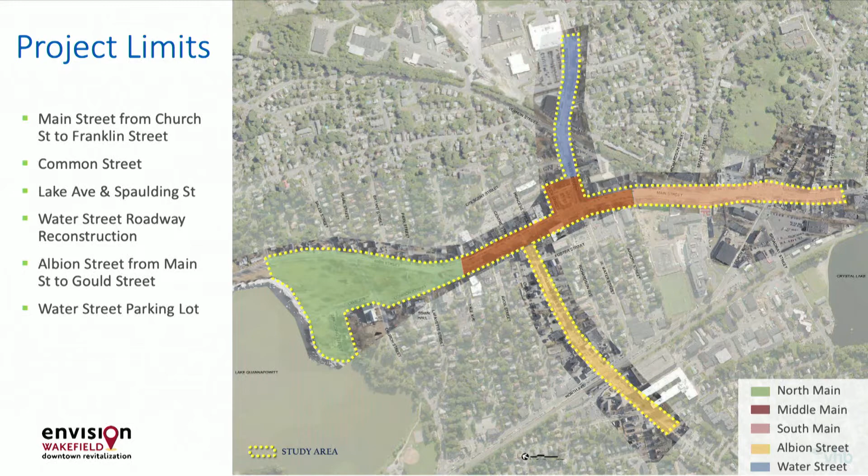The vision has always been the same. It's really making this a destination. We want to make sure that even though people are driving through Main Street and on the other surrounding roadways, that it's a safe condition for those people that are passing by, but also the people that are visiting Wakefield.

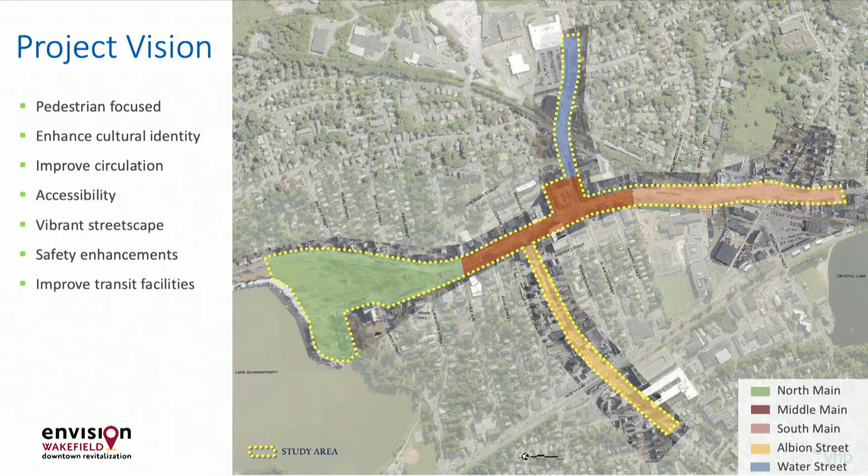One of the biggest objectives and what we've heard is we want to make sure that it's a walkable community, that people can get from the Galvin School and the new bike path going in adjacent to the Galvin School all the way up to the downtown area and enjoy the amenities you guys have in Wakefield. It's a beautiful town. We want to make sure people can actually come and get to it safely in all modes of transportation, not just vehicle, not just pedestrians, but also cyclists and buses. People navigate around with the bus routes that are around on Main Street and Albion Street.

This is just some of the pictures we've been showing throughout, some of the substandard conditions that are here. This is from last year where you can see people parking in the crosswalk locations. I want to point out, because there's been a lot of concerns about the width of Main Street and where pedestrians are crossing, there are a high amount of accidents occurring on Main Street.

There was just one a couple weeks ago, is that right, where a pedestrian got hit by a vehicle at the intersection of Main Street with Water Street. So those things are very serious, and we want to make sure we address those issues as we move forward with the design development.

You can also see from these pictures that some of the materials are tired. When they were first installed, they looked beautiful, absolutely fabulous, and now it's time to actually replace them with more fabulous things. They've lasted through a life cycle, and now they need a new life.

So we went through a public process from November of 2018 through last year to town meeting, which was in November. We went through a public process that was a pretty hefty public process. There were monthly stakeholder meetings. We had public meetings, I'd say, every 6 weeks or so.

The town has a wonderful communications point of contact, Jen McDonald, who actually did all of the social media, and she helped out as much as she could. It was just a terrific job of messaging the project and making sure the information was out there, that anything discussed in public meetings, the videos we showed, was actually posted on the town website, and they're still posted on the town website. So if there's anything you'd like to see that had been presented in the past, they're still up there for people to take a look at.

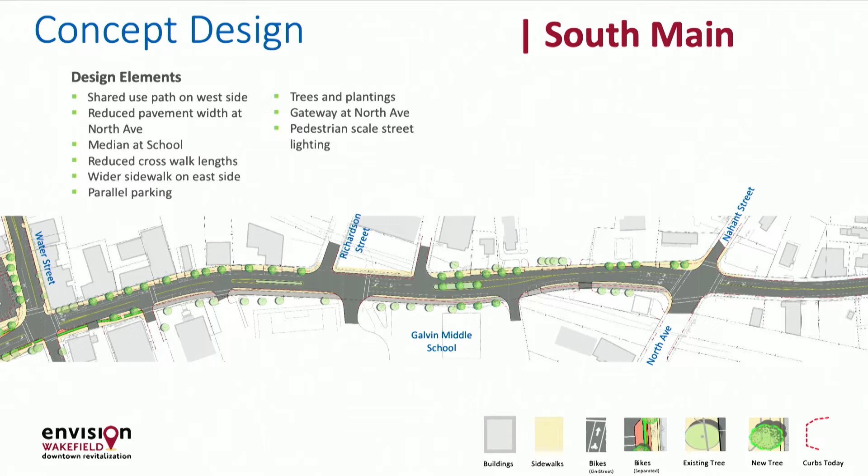On the section we're calling the South Main section, Water Street is down here. The parking lot is getting reconstructed as part of the project.

The thing we heard a lot of feedback on last year was parking, and the concern for parking, because although we're keeping the angled parking as much as we can where it meets standards, some of it has to go away because the roadway is just too narrow. If we kept the sidewalk where it is now and tried to put in angled parking, it doesn't meet what you need for emergency access and a travel lane with an offset for people to safely back out. To note, there were 10 accidents here over the last 3 years from people backing out of angled parking and hitting other vehicles or pedestrians. That's scary, so we're recommending changing this angled parking.

To offset any parking loss here, we're also introducing parking on Princess and Center Street. That's part of the project, reconstructing those two roadways. Can we take questions after the presentation? Is that okay?

I promise I'll go back to the slide.

What this is also showing is the angled parking in areas where you have enough offset between the median island that's out there now and the angled parking.

Also, if you walk out to the intersection and take a look, there's a lot of unused pavement out here. There's a pretty wide area - you can see the dashed line that represents the edge of the pavement, and it's kind of at a skew. So what we're doing is cleaning it up a little bit, making it more of a traditional intersection with turn lanes and through lanes on Water Street itself.

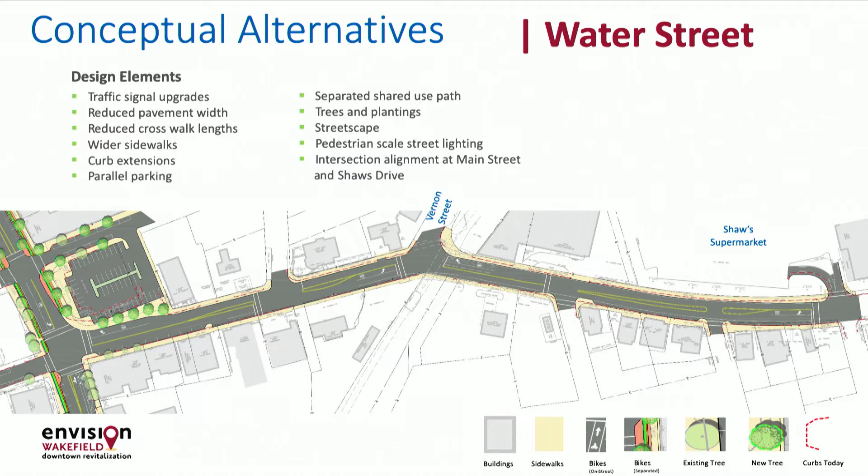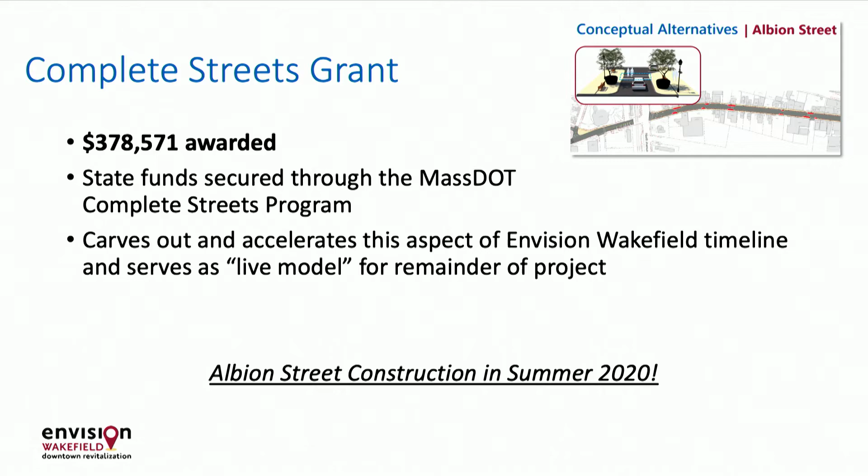One thing I wanted to note, which is very exciting, is that not only did the town get approved for the $26 million for Main Street and the Main Street project, they've also gotten approved almost $400,000 to do what's called complete streets amenities on Albion Street, and that will be the first phase of this project. It's really fantastic because it demonstrates momentum - it's going to build momentum. We're in this for a little bit of time with Main Street, and this allows for construction to occur and chip off the first piece.

This has been in the planning for a long time, and Albion Street is just a perfect example of what could happen on Main Street with the materials that are going to be selected and some of the features with the bump outs and shorter crossings - because that's another concern, people are concerned with crosswalks on all of the roadways. This is going to be a perfect example of what can happen and what the vision will be on Main Street.

Oh, and by the way, it's going to be under construction this summer. It's anticipated to be under construction this summer, so it's going to be pretty quick. Since we're already in spring now in February, it's going to be quick.

So what we want to talk about are next steps, moving forward from here, just to give you a piece of what's going to happen over the next year or so. Over the next month and a half, there will be another public meeting that will talk about some of the palette of materials that can be selected for these projects. We have to take a look at durability, aesthetics, obviously what it looks like in terms of what the town wants to see.

So what works for the town, what doesn't work for the town - some of the things we have to put in, like vertical granite curbing, will be put in, but some of the colors that are out there, some of the different types, like benches or plantings, will be presented to you, and would love your feedback on that. That would be absolutely fantastic. So I think the first public meeting on that will be in March, so we can actually talk about some of the materials.

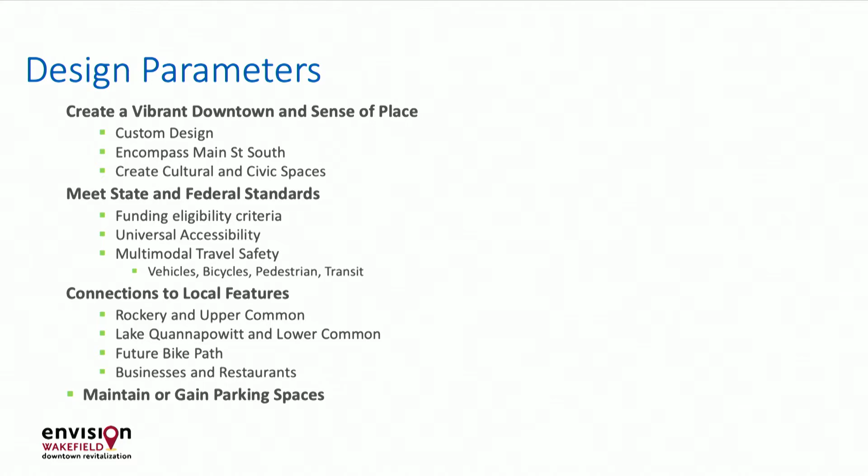And the parking itself, we've studied that. We've done some parking studies where we've taken a look at how quickly the parking spaces turn over. With the parking enforcement, it sounds like that's a success story too—people are looking to park but also not park there all day, and they're really paying attention to the hourly restrictions on the parking, which is absolutely fabulous. That just means there's a lot of circulation, a lot of turnover.

There are a lot more people who can go to the businesses and downtown destinations like the library and the post office, and people who may be commuting from Wakefield aren't occupying those parking spaces. It's terrific.

So with this, I'm going to hand it over to Jeffrey. Are you sure? I can just keep going if you want. Okay, so sympathize with Jeffrey, he has the thing that's going around right now. Trish makes it sound so bad, right?

Well, I'm so delighted to be here tonight because I just wanted to echo all the congratulations, because having worked with many communities just like yours, it's kind of exciting to be at a point in time where I know how hard the entire community has worked through all of the different public meetings.

We really enjoyed having that conversation with you. We've seen all of the different revised plans and thoughts as we've come back over those months. And now you're at the point where you can actually start to advance into the design development of the project and really start to let this whole idea come to life through the different materials and these things.

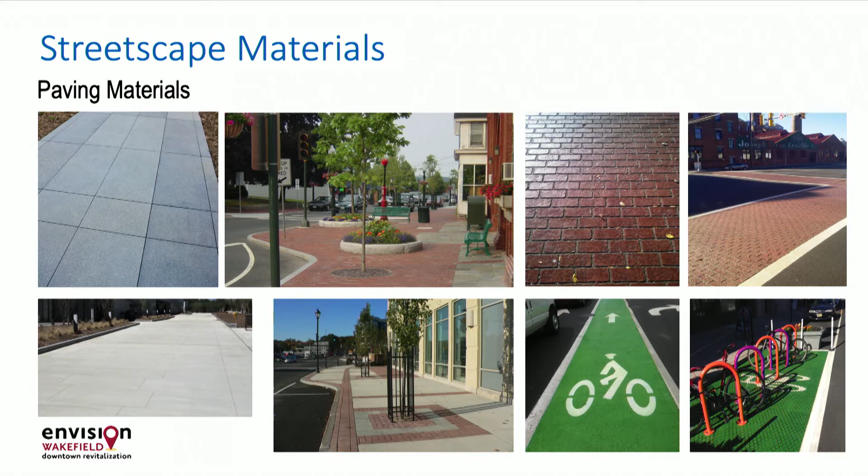What does it mean in terms of some of the street furniture? When you walk up and down Main Street, as you get closer to the Common and down to the lake, how do things like street furniture and where those benches are located really reinforce the activities that are both there today, as well as what can happen when the road gets reconstructed with a lot more places for people to walk and dine and be outdoors?

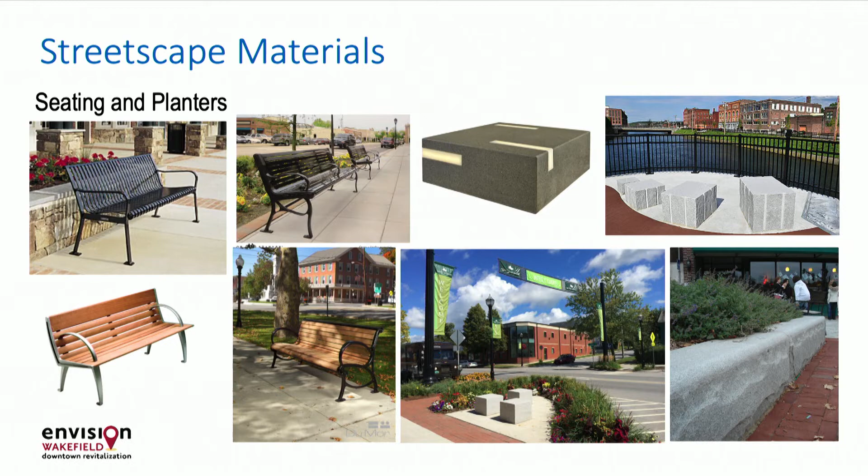And while we may think traditionally about some of the benches that might be out there in historic main streets that are not uncommon to Wakefield, what might that look like if we start to get a little more creative down on the bottom here or in the upper left-hand corner, where maybe we bring in different material choices? Maybe there's different ways of having people get seated, bringing in different materials and textures as we go through the heart of downtown as well.

What does it mean in terms of simple things like trash and recycling and some of the bike racks that are out here? This is intentionally showing a broad range of that palette, as Ed talked about before, where you're able to bring in different ways of celebrating your identity as the downtown, understanding some of the iconic footprints of downtown, and the signage, lettering, and fonts that go into that. There are very high-tech ways of hiding some of the services behind these trash receptacles and recycle bins. What do those look like? What are the colors? What does the palette look like there that really brings the heart of downtown to life?

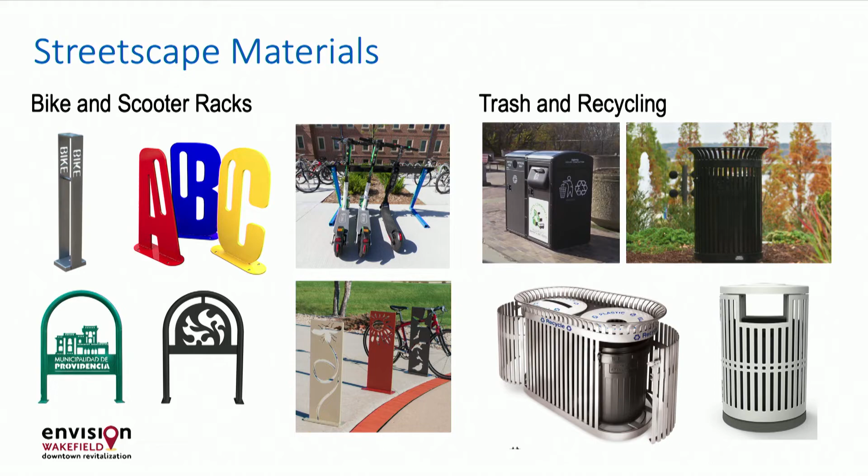And when you think about celebrating things like sustainability and recycling, many communities are looking at energy being captured, photovoltaics, powering some of the recycling and getting those uses to happen. It's also about accommodating expanded activities for downtown, where the bikes might go, or things like scooters. So you have a way of refreshing all the different modes and celebrating those in different spots here. So a lot to talk about on all of those fronts as well.

When it comes to lighting, here again we have a lot of different things to talk about, from the overhead lighting that might be higher, that talks to the vehicular scale, some of the banners and how those banners can come to life, pedestrian scale lighting as well, and what the tops of these lights look like. There are so many options out there today that one doesn't automatically have to assume it's one fixture or the other. There's probably hundreds of choices we can talk through, and how those meet some of your local standards, some of your maintenance standards as well. There's a lot we're going to be talking about in terms of that.

But what's most important here is how does that really, whatever we pick, tie into the character and the walkability and the scale of your downtown? We heard so much about making sure this feels like a walkable place here. Those ingredients really can help it feel walkable and at scale.

Bollards here off to the right-hand side. Again, many choices there, but could they light up some of the crosswalks to help make them safer at the same time about being a scaled element that people can relate to as well?

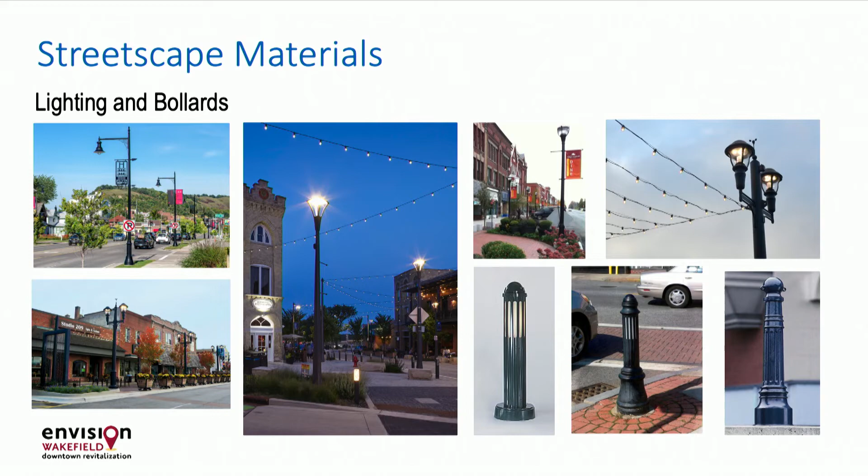Excited about having that conversation with you.

So what we thought we'd do is close by showing you a couple of other places that have gone through this transformation. We shared some of these slides at the town meeting, and I think it was actually a pretty helpful set of slides in showing this transformation.

So, for instance, the amount of parking on Princess Street and Centre Street - you only have a handful of parking spaces right now on those two streets. But what we're doing is building out those two streets to have about 20 more spaces than what you have right now. So you can see there's spaces all along here, but right now there's not spaces all along either one of them. What we're doing is building out as much parking as we can to offset some of the angled parking that is lost in this area. So we're matching it.

Thank you. Yes ma'am, hi, thank you for your time tonight. In line with what he just said, there wasn't a public meeting this past fall. Maybe it was a meeting with the town officials, but there wasn't a public meeting for us to go to. So I'd be really interested in hearing those numbers - it's very important to see what we're gaining from this project. So if we could have that in a public manner soon, that would be super. I'm very concerned about the Lake Ave, Spaulding and the Rockery area.

I know some people who have done some math. We're losing an awful lot of green space, and we really have not had a discussion about the amount of green space we're going to be covering with asphalt. I hope that's a separate meeting just in that area itself. We can talk about that in the future, because mathematically we're losing a lot of grass. And that might not work for all of us.

And in looking at this picture, I had never noticed before the parking lot on Main Street in front of the old bank near Parker Florist. Am I right? There's one entrance now?

This parking lot right here? No, to the right, this one, closer to Water Street. Yeah, this one. One entrance and one exit? There's one entrance and then an exit on Water Street right now. Looks like there are trees right there, though.

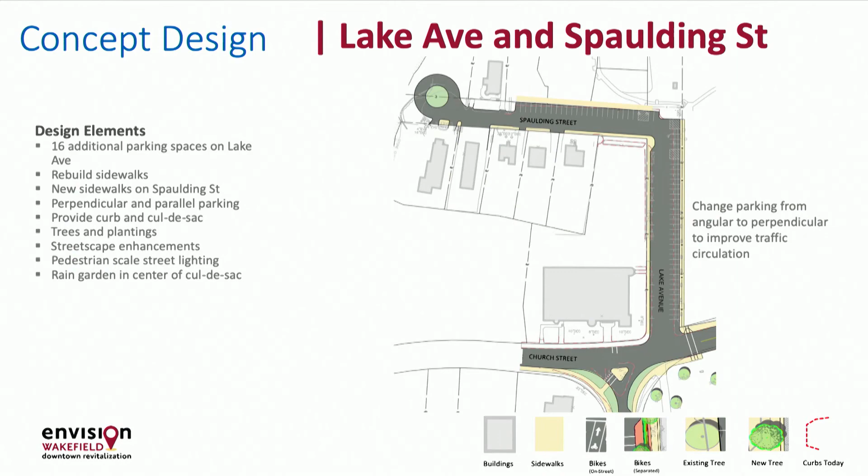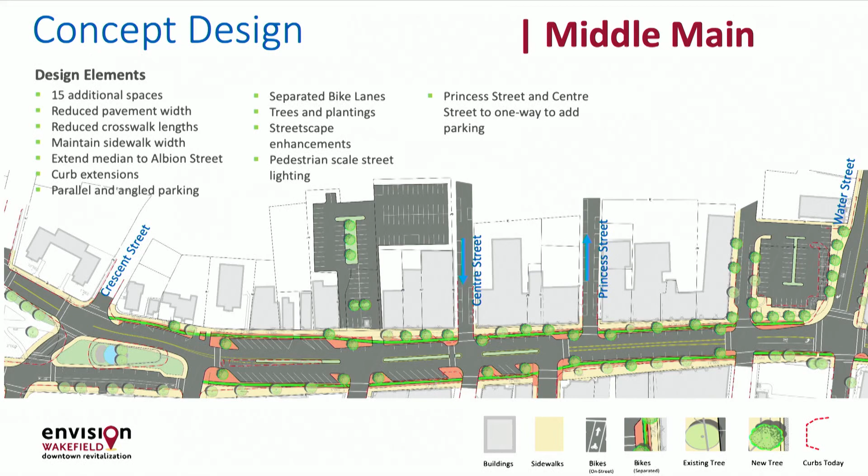What we're doing for the future is trying to better manage the access into this parking lot by having it come down on Lincoln Street. The access on Water Street is causing accidents at that location because people aren't really realizing that there's an access spot to the parking area here. They're more focused on the signal, so when people are coming out onto Water Street, there becomes a conflict right there. So my question is, there's one entrance and one exit?

That's correct. I'm concerned about that as well. Okay, that looks new to me, I don't remember seeing that before. These are the same plans. Okay, I didn't see - I don't remember it. I don't remember it.

Thank you. Yes sir. Hi, Bob Mitchell, Spaulding Street. $26 million is a lot of money coming through the government - federal, state, local. And I think common sense would tell us if the issue is parking, which it clearly is, for only about a tenth of that we could probably build more parking spaces for our community.

But one thing I have to disagree with is on Common Street. That affects me personally - my friend who lives on Common Street has seen emergency vehicles and many other vehicles going the wrong way on Common Street. I know that's going to change over time as people get educated, that's fine. But we do know that one-way streets have a higher rate of travel - cars go faster on a one-way street. So that's going to increase the speed there.

It's also more difficult for emergency vehicles to come to my house on Spaulding or to attend to the thousands of people who are in front of my house on a Saturday morning. It's going to take the emergency vehicles longer to get down there. It's also less convenient for people to get down there and get back out if they live, say, in Greenwood. So I'm not a fan of making Common Street one way. And I would hope people think very deeply about if they want Princess Street and the other street to be one way, especially where that's our critical artery to emergency services.

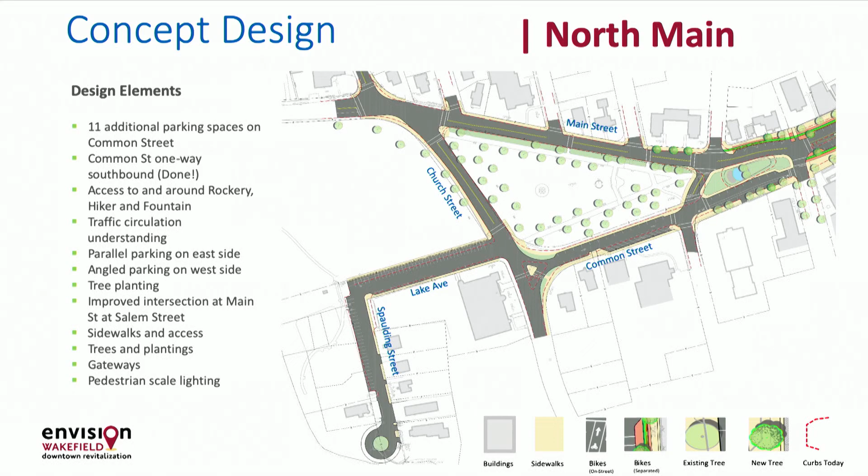The green space on Lake Ave is really where the sidewalk area is right now, so it's not really green space. We're looking to widen this just where the granite block fences are—the granite posts—we're not touching that. None of that is being changed. The lower common is staying the same, we're not impacting anything there. We're putting a sidewalk on there, but we're not changing that fencing at all.

There's an existing sidewalk there now, no? No, there's grass, granite post, sidewalk, street—I live right down there. We can take a look at it, but if there's any grass being lost, it's just a sliver. We're not influencing it.

Do you want to pay for it? We've spent millions of dollars of our money. It's very cavalier of you to say it's only a sliver. No, we can quantify that. Thank you for that.

Just real quick, do we know how many bikes go through there now? I'm a big cyclist—this is more for the future, and how many would be projected? I know it's difficult, but I'll find out if there's been counts done. I know there are a lot of races and things, people do bike around the lake.

There's a bike path being installed that's going to formalize access, with the Wakefield Lynnfield bikeway that's going in. I don't know if there's any specific counts associated with that. It's hard when facilities are being installed right now to count the number of users versus how many more users are going to use it once there's a safe bikeway in the area.

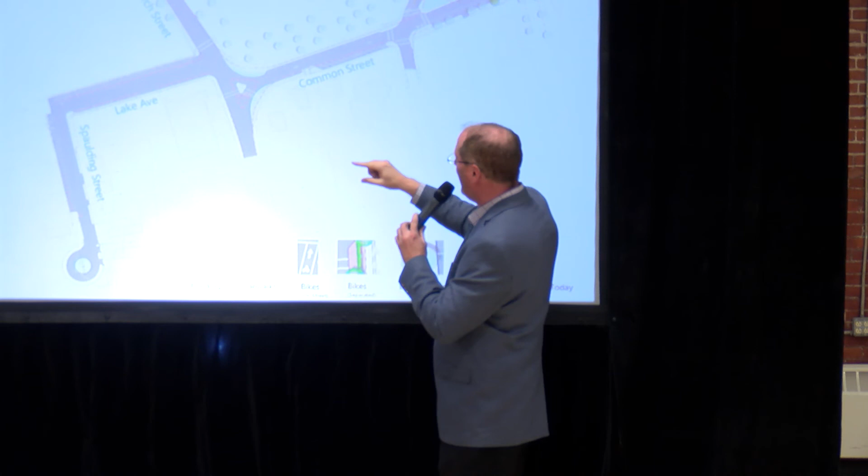Trish, I might just add in, I think there was a great comment about questioning where some of that green space goes. I'll use this graphic as a point—we can answer that question. This is a pretty small piece of land, and we get how important it is. I also want to point out we're trying to find other places, like here where we're adding some green space back at the corner. This whole sliver is a significant win for the community. Up in that corner, for example, over by the Rockery, Trish—I can't quite reach that far—all the green space there.

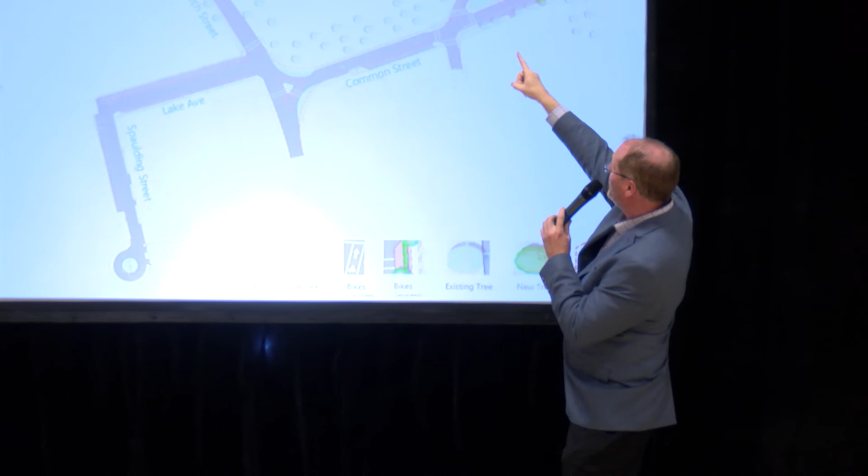So maybe we look from the Rockery down towards Lake. I think you might actually find that we're putting a fair amount back, that's the point too. Okay, that would be great for you to quantify, because I don't understand what it is. We totally hear you, but let's show you the full picture as part of that. That would be great if we saw those numbers. Thank you.